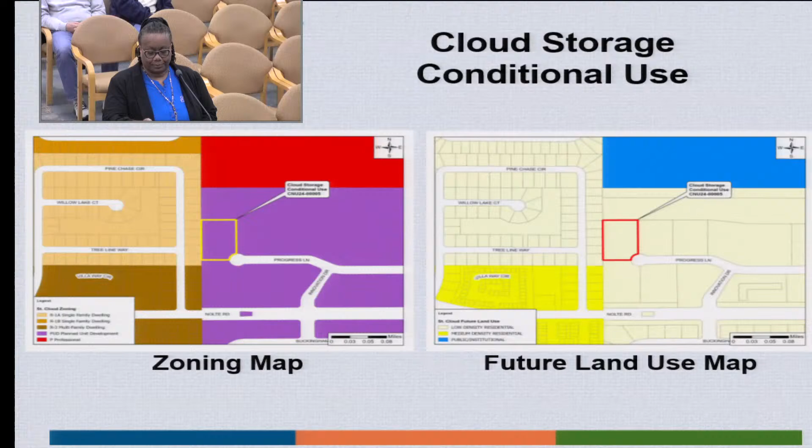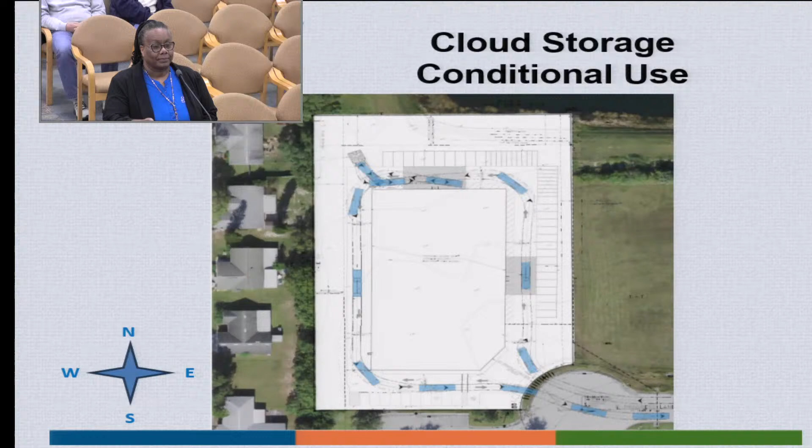This is a graphical depiction of where the storage facility would be located within Stevens Plantation. You can see it is at the end of a cul-de-sac and does back up to some residential. This is the concept plan of the storage unit and how it will be set up, as well as the fencing and the interior. This is another view of the storage facility, showing there are no roll-up doors that will be visible from the outside along any right-of-ways.

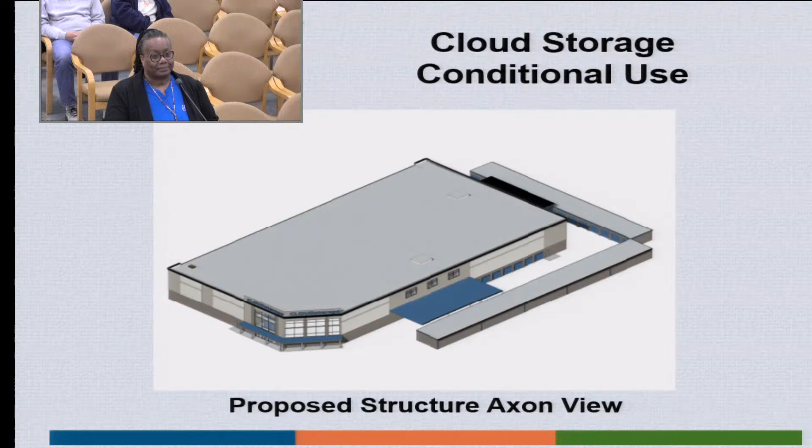They do have some visible here, but that is going to be behind their other facility, so again you won't see any of those roll-up doors. This is the south elevation of the facility, which would point out to the right-of-way. The proposed east elevation again, these doors will be behind another building, so you won't see these facing out to the right-of-way.

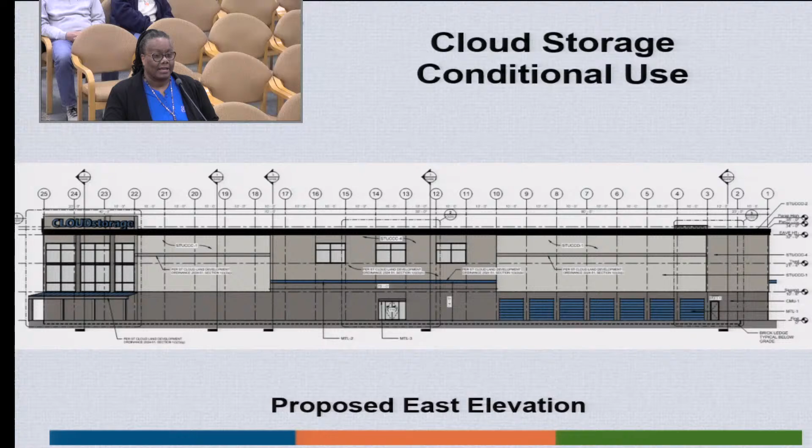Again, staff does recommend approval of this resolution 2025-013R with the following conditions: the approval of the requested conditional use does not constitute approval of the provided concept plan as a site plan. Changes to the site will require approval of a site development plan and any additional approvals required by the Land Development Code. Vehicles for hire, such as Ryder, U-Hauls, etc., are not permitted at this location. Staff requests that the Planning Commission recommend approval of resolution 2025-013R with the conditions as stated by staff. Staff is available for questions, as well as the applicant.

Thank you. Does anybody have any questions for staff as submitted? I have a question. In this area with the building, are there any codes that dictate the height of the building? Because this one is predicted to be a 3-story, correct? Correct, it is a three-story. Within that PUD, they do have some height requirements in their commercial area, as well as our land development code will determine the height of the building. This building does not exceed the height that is stated in their PUD. Okay, thank you.

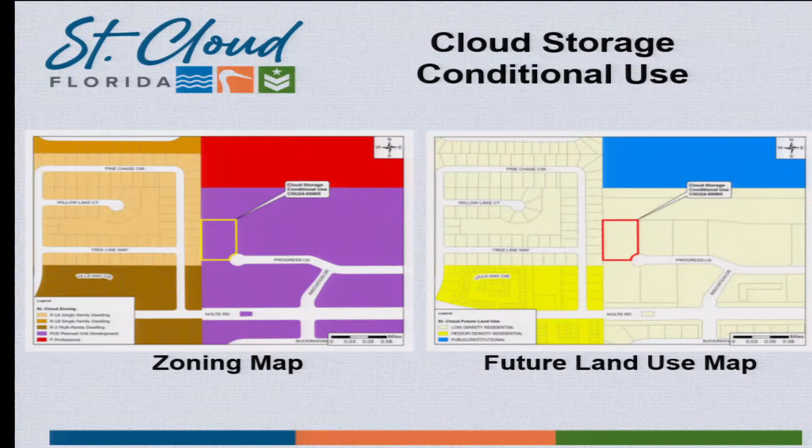Because this is the corporate campus in Stevens Plantation, so all of this is designed to be some type of commercial use there. Thank you, that's what we were looking for. Clearly with the size of the lots, I guess. Thank you. Is the applicant here and would you like to speak?

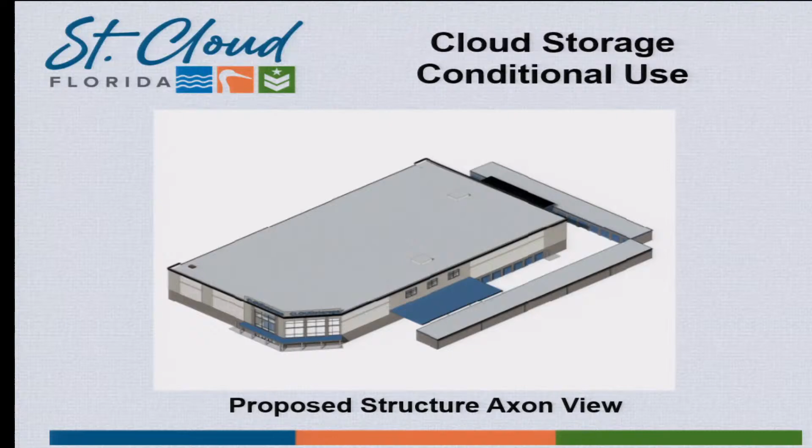So yeah, keeping that in mind for any of the Pine Chase residents, this will be in front of city council at their next meeting. Do you have any other concerns? Anybody else have any questions for the applicant? No. Okay, I'd like to entertain a motion at this time.

Anybody like to make one? I'd like to make a motion to recommend approval of resolution number 2025-013R based on the 6 findings within the land development code, along with the conditions proposed by staff. I second the motion. All right, I have a first and a second. All in favor? Aye. Is that everybody? Okay, any opposed? Passes all 4-0. All right, thank you.

All right, next is ordinance number 2025-01, LaSalle Avenue, and this is annexation number ANX 23-00005. Good evening, Ralph Keith, Associate Planner with Community Development Department. The case before you tonight is for a contraction annexation for the project known as LaSalle Ave. Under Florida state statute, the city is required to voluntarily annex real property if it meets the criteria of being reasonably compact, adjacent to city limits, and with the owner's consent. Due to a scrivener's error, we are seeking to correct the annexation by excluding 2 parcels adjacent to the parcel listed in ordinance number 2024-52, as the owner of those parcels did not consent to a voluntary annexation.

Ordinance number 2024-52 approved the parcels referenced in the depiction on the next slide, which did not meet state requirements for voluntary annexation, including criteria related to the property owner's consent.

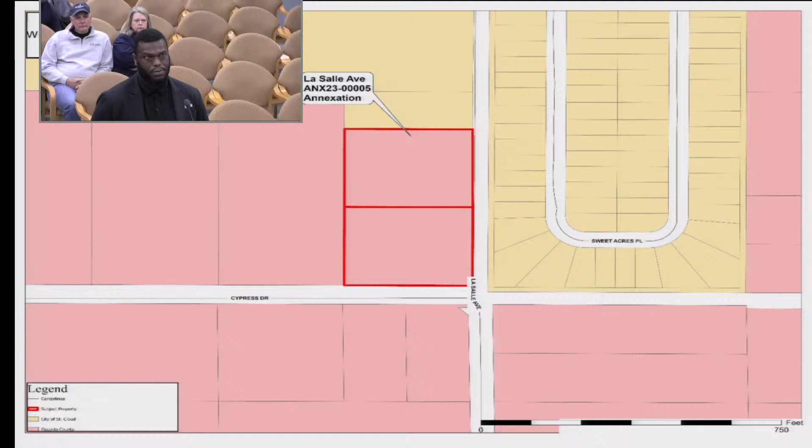Here's the depiction of the two parcels that will need to be removed from city boundaries.

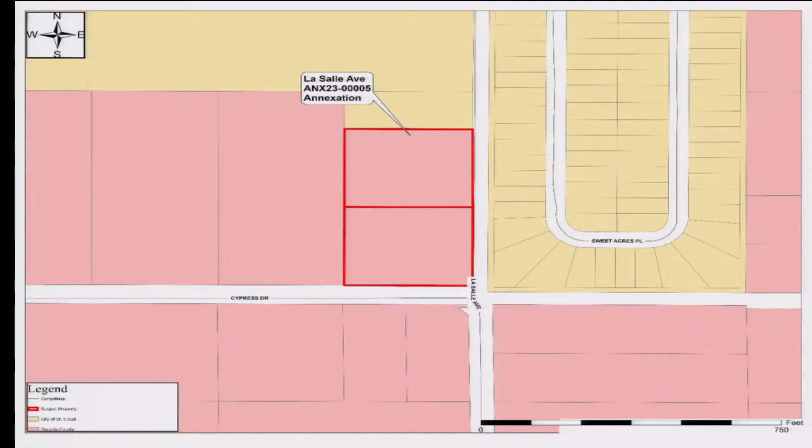Mr. Chairman, if I could just make a quick statement, this is a very unusual situation, as I'm sure staff will illuminate. In the 27 years our firm has been working with St. Cloud, I think this only came up one other time. This is essentially correcting an error that took place when other properties were annexed into the city.

These properties were affected and included when they should not have been, as reflected by a legal description that was in error. Staff is seeking to correct this on behalf of those properties, to contract the annexation as it affected them. As staff mentioned, the property owners did not wish to be annexed in, so they're in favor of this contraction.

I'm just sure it's been difficult for them. Yeah, definitely. Thank you, Mr. Thank you for elaborating. I appreciate it so much. Sure.

Per Florida State Statute 171.051, ordinance number 2025-01 will amend the municipality's boundaries to remove the annexed parcels from the city's jurisdiction and return them to unincorporated Osceola County.

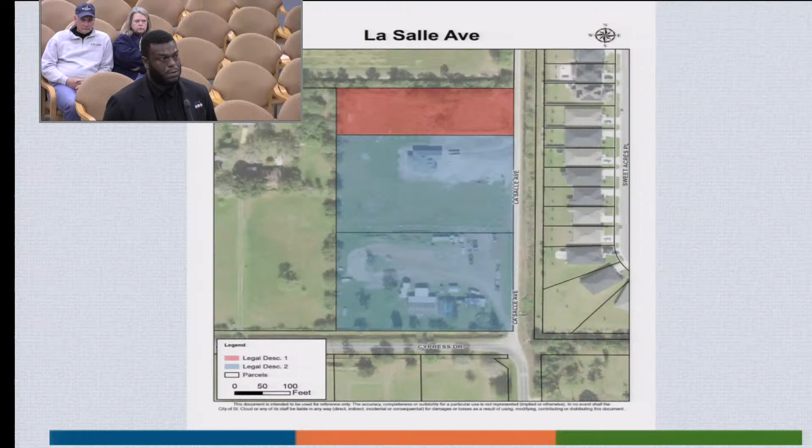This slide shows a depiction of the parcel in red at top, which was the initial parcel that was supposed to be annexed. The two in blue below it are the two that were also included, which will be removed. So the one in red will still be part of the city, and the other two will be removed. Is that correct? Yes. Okay.

Staff recommends approval of ordinance number 2025-01. Staff is available for any questions.

Thank you. Does anybody have any questions for the city staff?

Okay, we'll move on to public comment. Do we have anybody here that would like to comment on this ordinance? Okay, we will close public comment at this time.

Any other discussion? Just checking my understanding, you said the people whose properties these are, are in agreement with the idea of not being part of the city. That is my understanding. That's correct.

I was advised today, speaking with the city attorney, that staff had made direct contact with one of the property owners to affirm that again. The other property owner had been reached out to, but had not made contact today. But it was their understanding that these properties were accidentally included by way of an incorrect legal description.

The city has affirmed that the affected properties did not wish, nor did they file for a voluntary annexation, which would be required, even if they tonight said they'd like to be annexed in—they'd have to go through the process with a voluntary application for such. So the city believes they do not wish to be part of the city, and this is a corrective measure the city is recommending be taken.